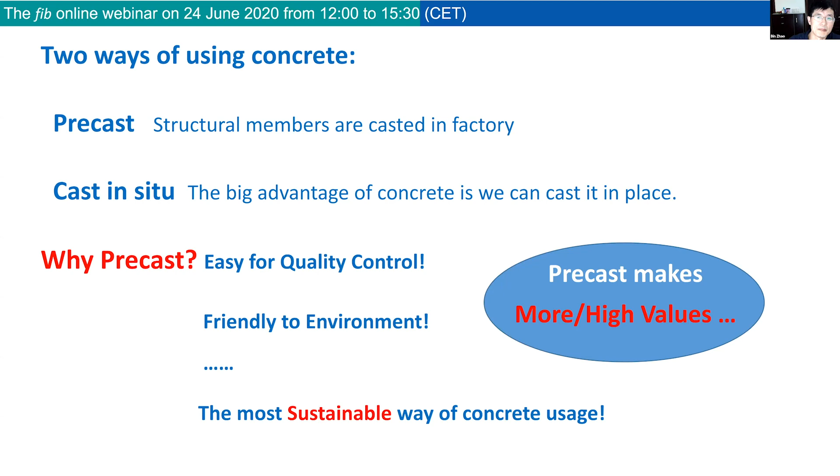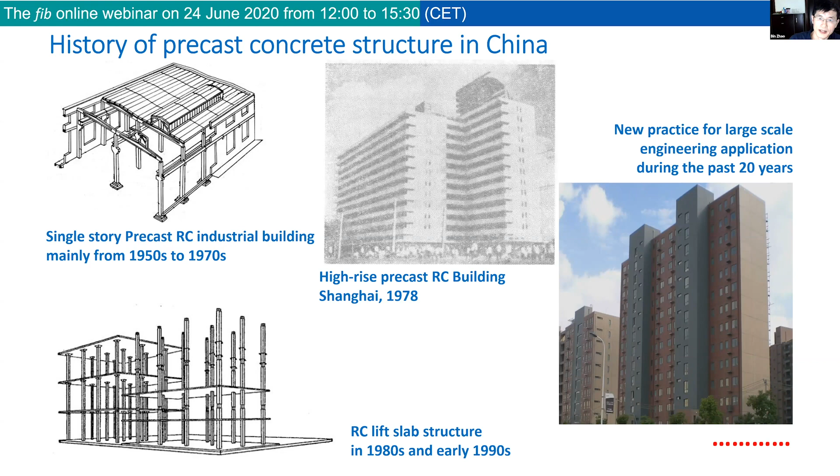The picture here shows the history of the precast concrete structure in China, from the 1950s. Let's just skip this slide. In fact, for casting in situ, you can also use some precast members, for example, the widely used hollow slab.

When we talk about precast structure, generally we mean full or part of the structure is made of precast members with wet joint or dry joint. So then the quality of in-place work and the seismic capacity become the key issues of the structure system.

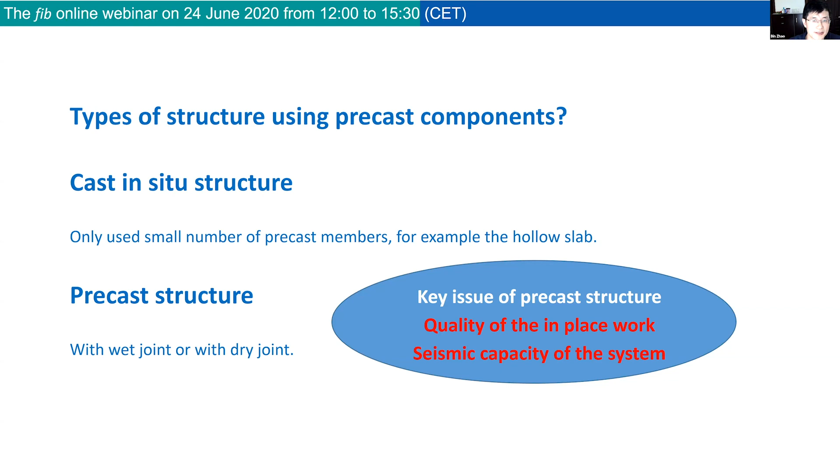So then comes our second question. Does precast make monolithic concrete structure? In this part, we will talk about if precast concrete structure with wet joint could have the same or similar seismic capacity, I mean, compared with the cast in situ structure.

So let's take this concrete frame as an example. We choose the joint as the test model, as you can see. Totally, we have 4 models here. All of them are full scale. For the first one, it's cast in situ with beam, column, sub-assemblies. We call it sub-assemblies.

The second one is precast concrete beam-column sub-assemblies, but for the joint part, the wet joint, we use normal concrete. Then we have another 2 specimens. We call it precast concrete beam-column sub-assembly with wet joint using fiber reinforced concrete. So we can just keep going.

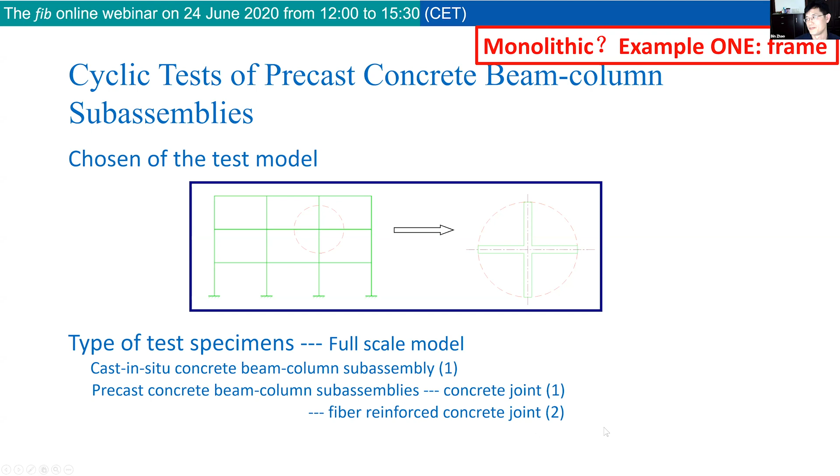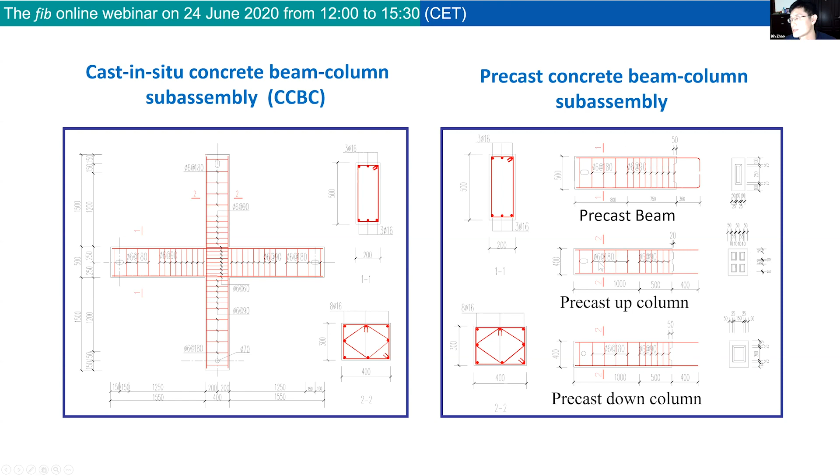Here you can see the details for this specimen, the cast in situ one, all the detail is shown here. Here you can also see the precast members. For the precast specimen, you also need the joint part. For the joint part, I have all the details for the shear reinforcement of the joint. So for the first one, cast in situ, the distance between the stirrups for the joint is 60 millimeter.

With stirrup ratio 0.83. For the second one, the wet joint used normal concrete, so we follow the same distance like the cast in situ one, the same ratio of the shear bars. For the third and the fourth specimen, we use the fiber reinforced concrete. We increase the distance of the stirrup from 60 to 120 and 180. So the ratio of the steel bar decreased.

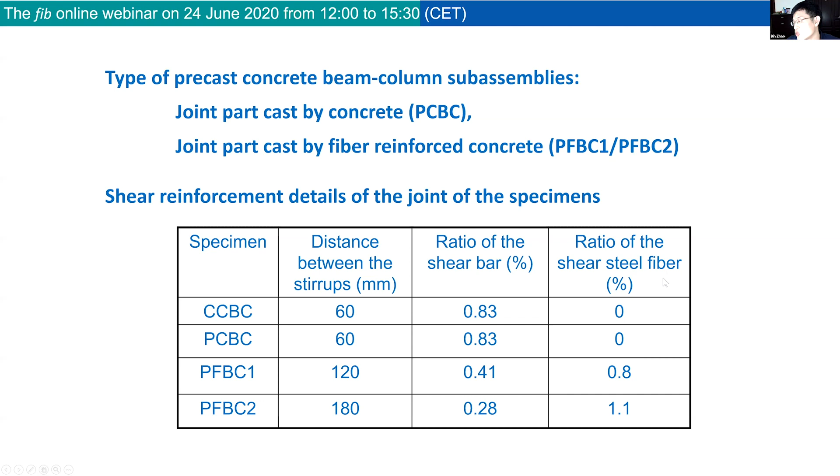But for concrete, we use the fiber reinforced concrete with 0.8 and 1.1 ratios for the steel fiber. So the pictures show you the cast in situ specimen and the precast one. So we can keep going.

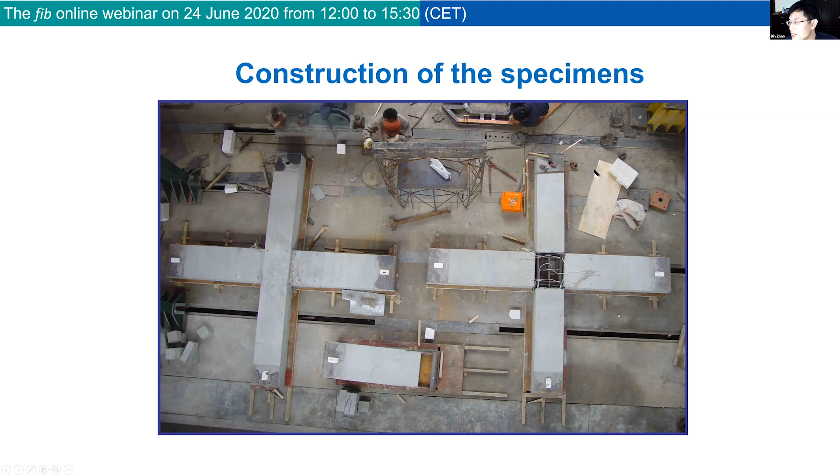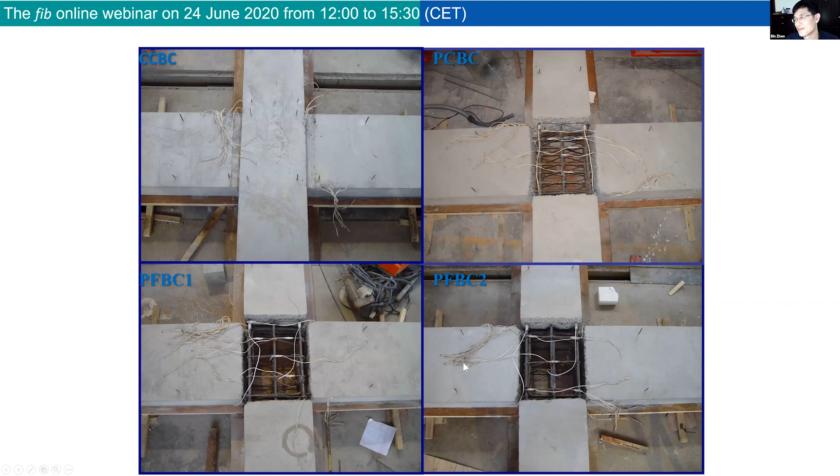So here you can have a close look at the joint. This one with more stirrups uses the normal concrete. This one with bigger distance, we use fiber reinforced concrete. This one we use more steel fiber. So that's the philosophy of the specimens.

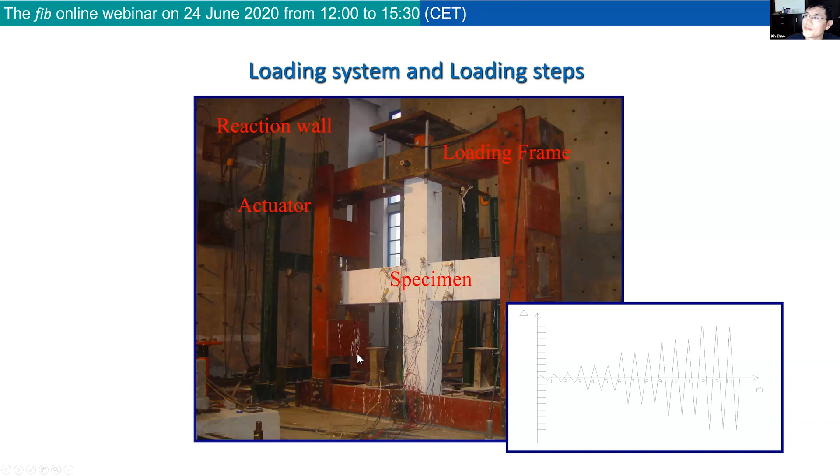So for loading, we use the loading frame. Here you can see the specimen, then you can see the actuator, the reaction wall. We follow cyclic loading to see the seismic behavior of the specimen. So after the test, you can see the pictures. The first photo shows you the cast in situ specimen, the front side and the back side. So you can see the hinge really occurs at the beam end.

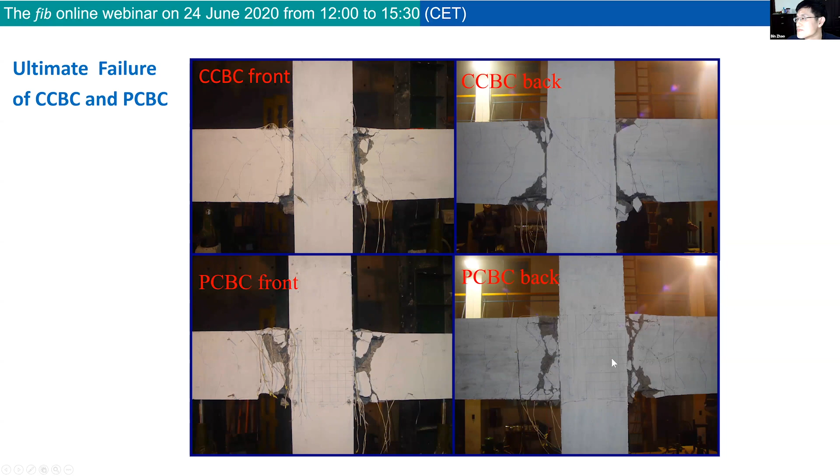For the wet joints using normal concrete, we got almost the same damage mode, the front and the back side. For the specimens with joints using fiber reinforced concrete, we got almost the same, even better result for the joint part because we use the steel fiber.

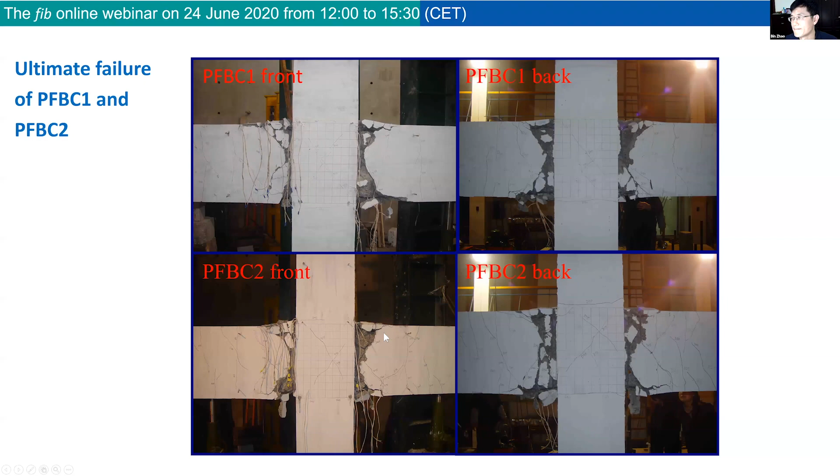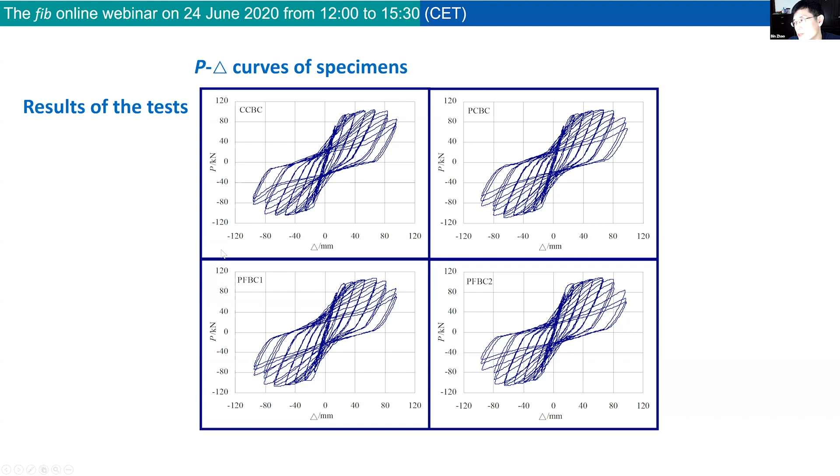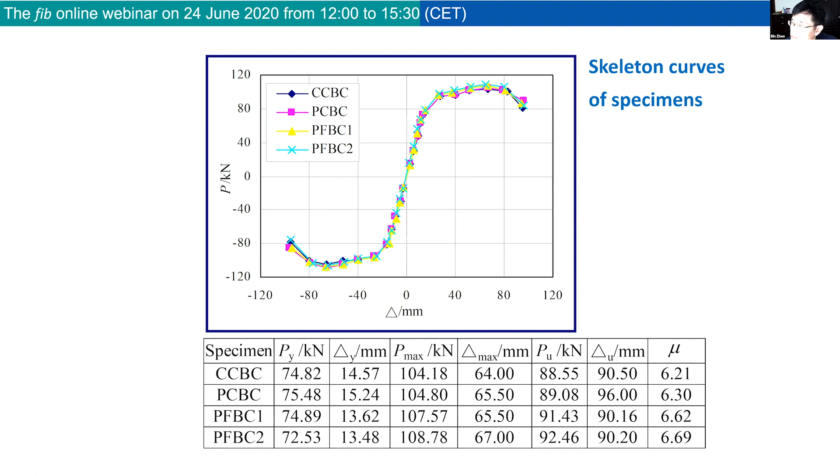So if you go to the curves, the load-displacement curves, you can see the curves for the specimens are very, very close. Here you can see the skeleton curves for all four specimens. It's very well matched. I think we can say the specimens really have the same seismic capacity.

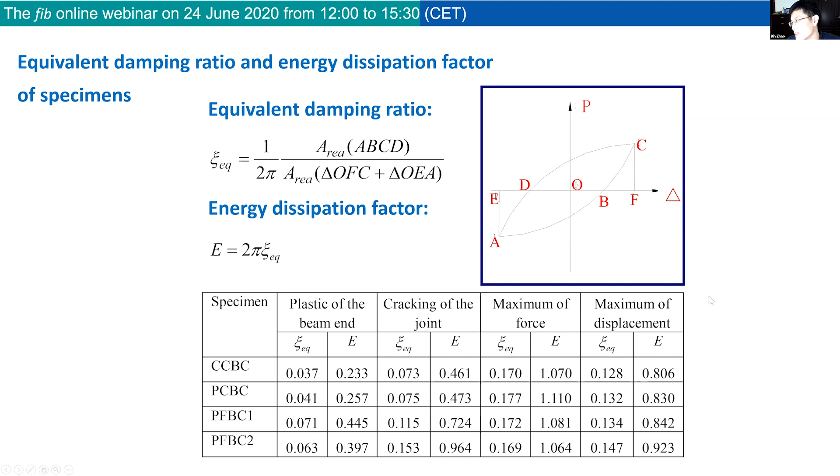From the test data you can also calculate the damping ratio to show the energy dissipation factors, but I'll just skip that. For a short conclusion, I'd like to say the precast concrete beam-column joint has the same seismic behavior as the cast in situ joint. Another conclusion is the shear stirrups can be decreased if the joint part is cast with fiber reinforced concrete.

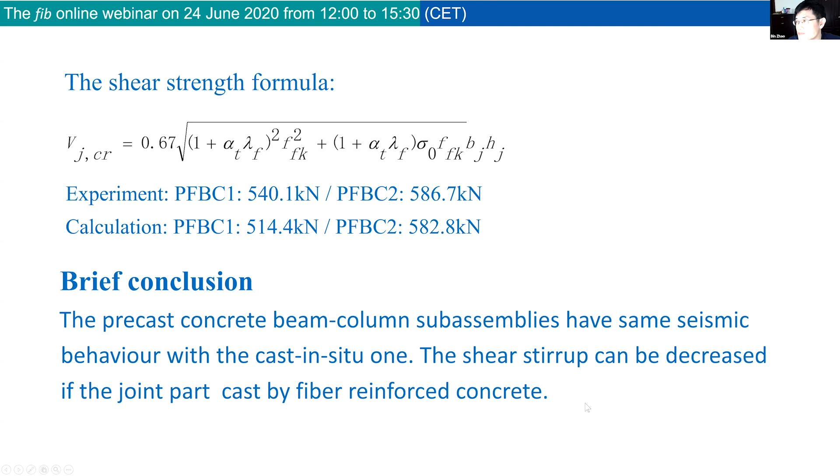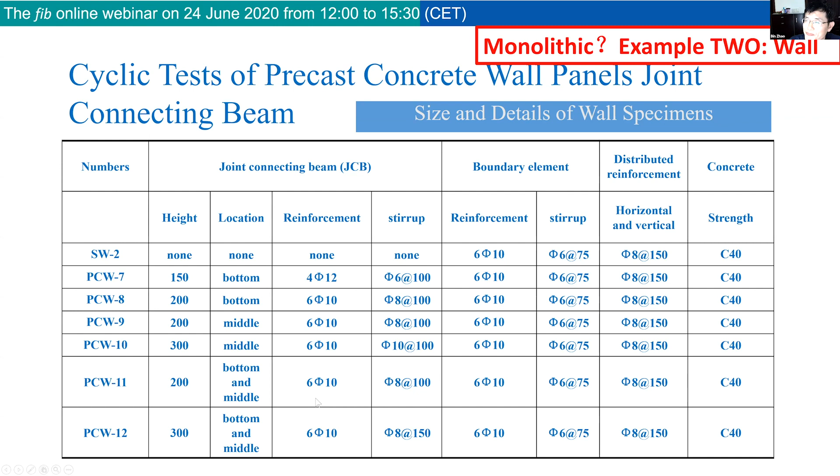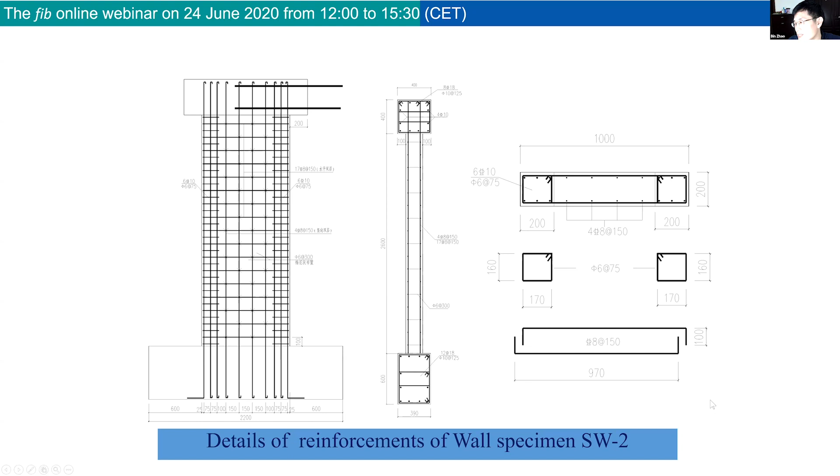For more details on the cast in situ one, you can see all the bars and the sizes. The wall panels have the same size. The difference for the precast wall panels is the joint, the joint beam, we call it a joint beam here. For PCW7 and PCW8, we have 2 specimens with joints at the same place. The difference for 7 and 8 is the height of the joint is different.

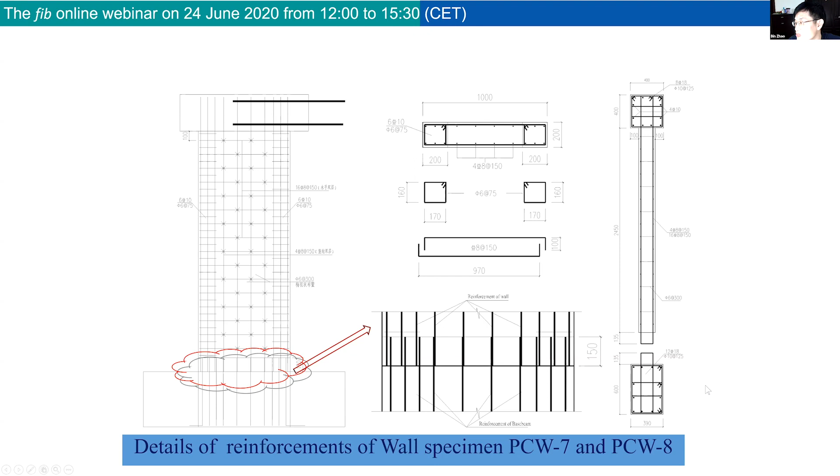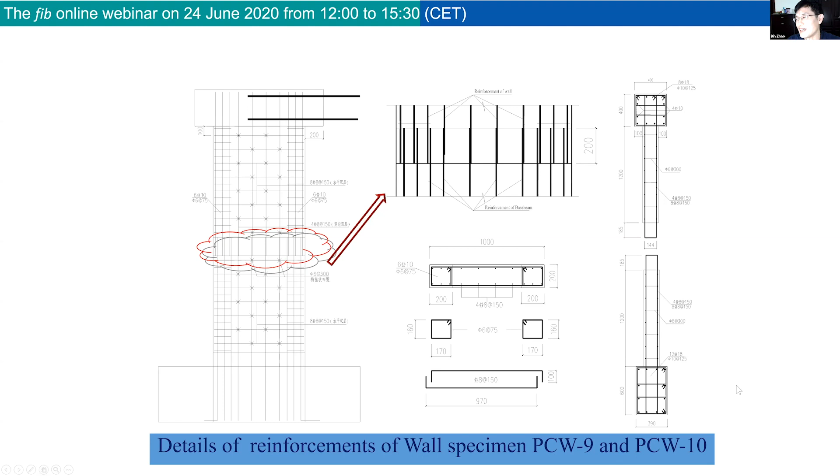Then we have specimen number 9 and number 10. For number 9 and number 10, we put the joint part in almost the middle of the wall panel. We just try to test the influence of the joint on the seismic behavior of the wall panel. For specimen number 11 and number 12, we have 2 connections, one in the middle, one at the bottom of the wall.

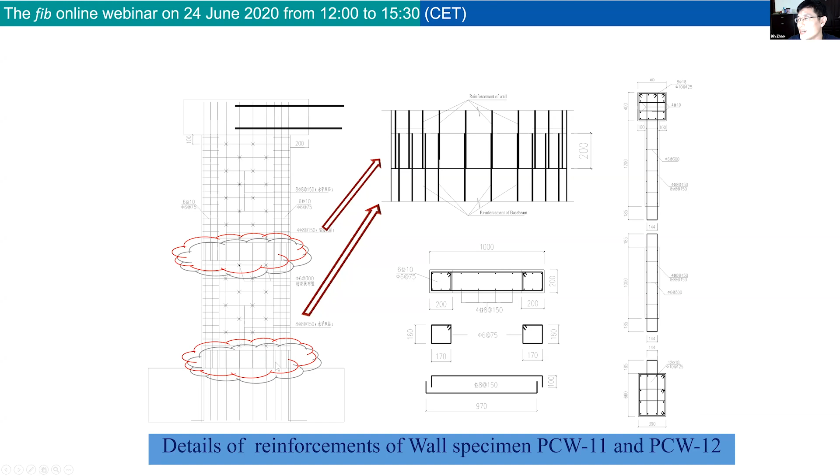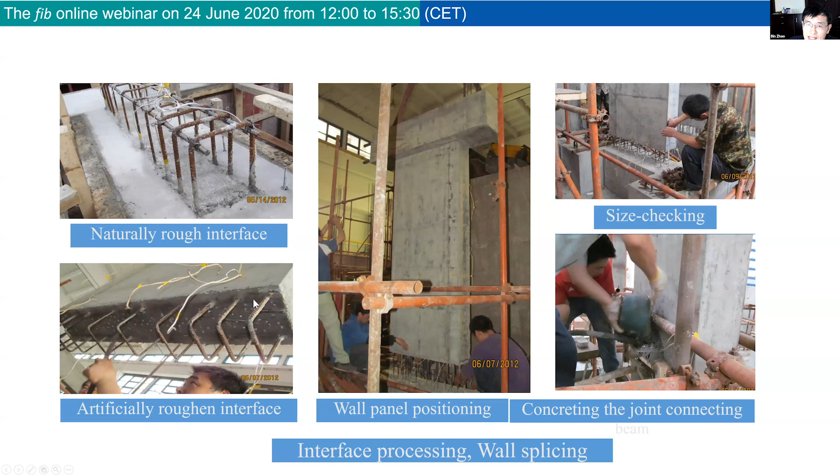So as you can see, yes, they tried to do a good job. But as you can see in the picture here, the quality of the wet joints didn't look good.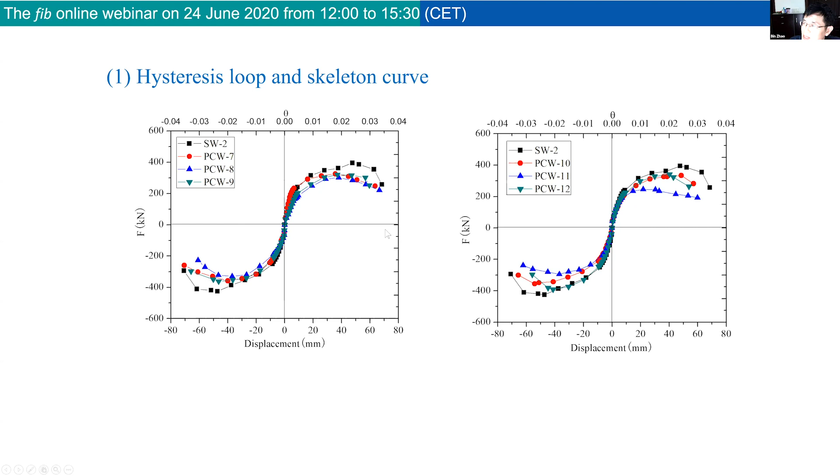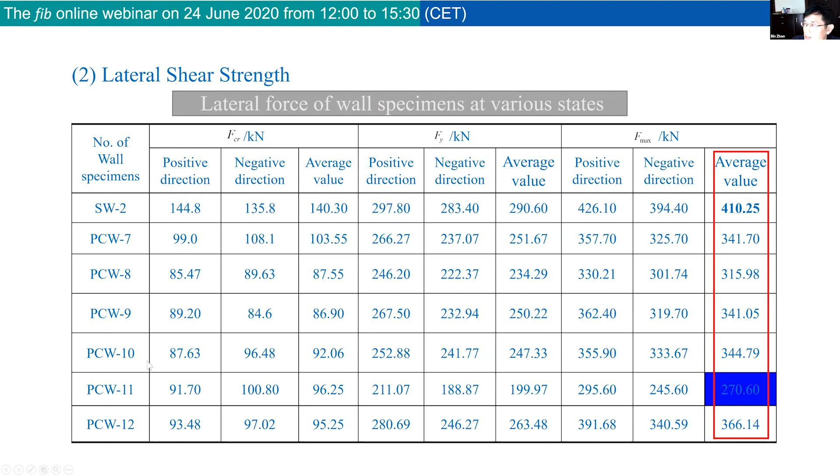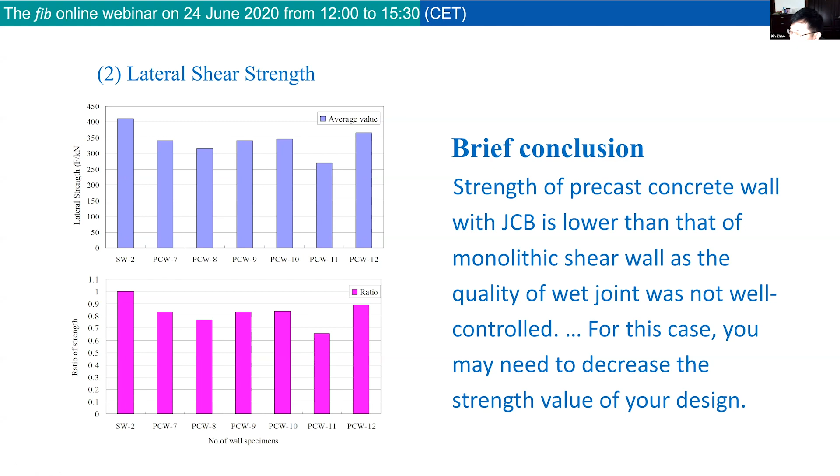We don't want to go very detailed on the test, so I just like to present you a general result. For this part, I'd like to say the strength of the precast concrete wall with the joint connecting beam is lower than that of the cast in situ wall panel, because the quality of the wet joint was not well controlled. So for this case, you may need to decrease the strength value in your design.

Then let's have a brief look at the behavior of bolt-connected precast concrete structure. We developed a modular precast structure system, as shown in the picture here. We set this room as a precast modular unit, just like a small room from a flat or even from a hotel. So we call it a precast unit.

For precast, we need to put all the units together. First, let's say the horizontal connection. For the unit here, they have one wall, but we divided the one wall into two parts. One half wall is attached to this unit, the other part to the nearby unit. So we put them together using bolt connectors. It's a real bolt; I can show more detail later.

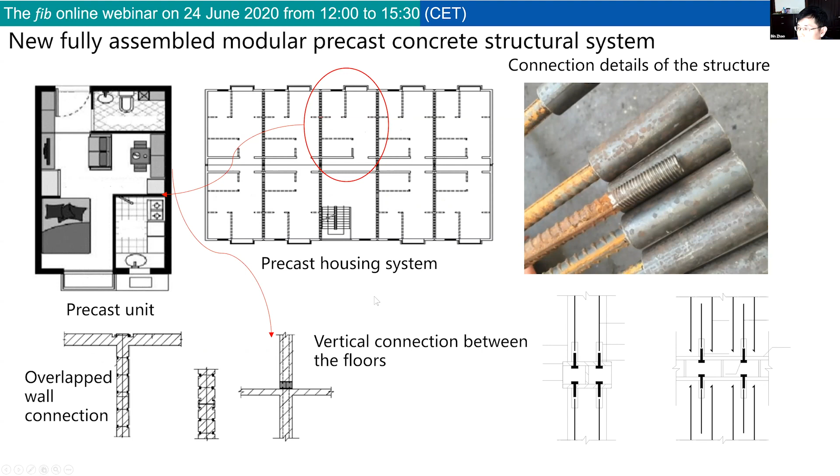Then for the vertical connection between the floors, we use the bolt system. Here you can see the bar, the connector, and the bolt. So we try to use this technology to have a new modular precast structure system. In total we tested 3 models. They are 5-story models, so we call them M5-O, M5 P1, M5 P2.

The first one is ordinary. Ordinary here means cast in situ, so it's a normal shear wall structure model. P1 is the modular structure system, but it fully followed the cast in situ procedure. Why do we have this model? We just like to check how the system works.

Another model we call P2. It's a real modular structure system: precast, fully assembled with dry joints. P1 also has the dry joint, but for P2 it's a real dry joint; we put everything together the precast way. For P1, we just have the idea, but we cast the model. We use the connector and the bolt, but we cast it in one time. But the joint is still there.

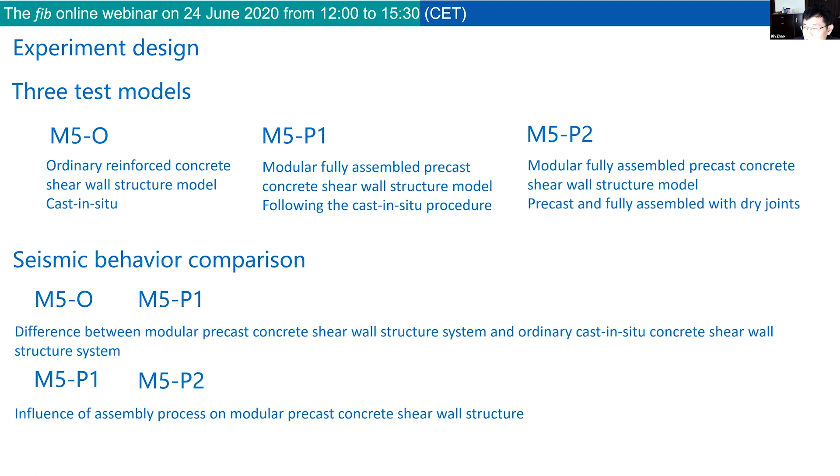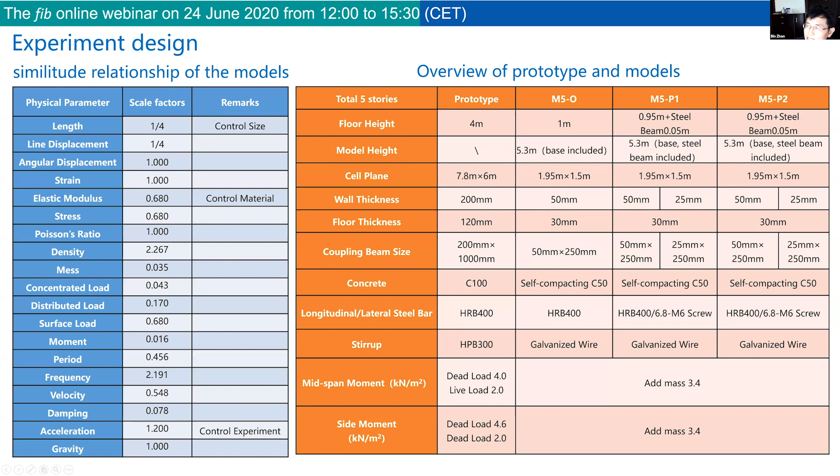For the model design, we chose the scale 1 to 4, that's 0.25 scale. I think we can go a little bit fast. Here you can see the size of the models. The size is the same for all models, and this one shows the precast model like this.

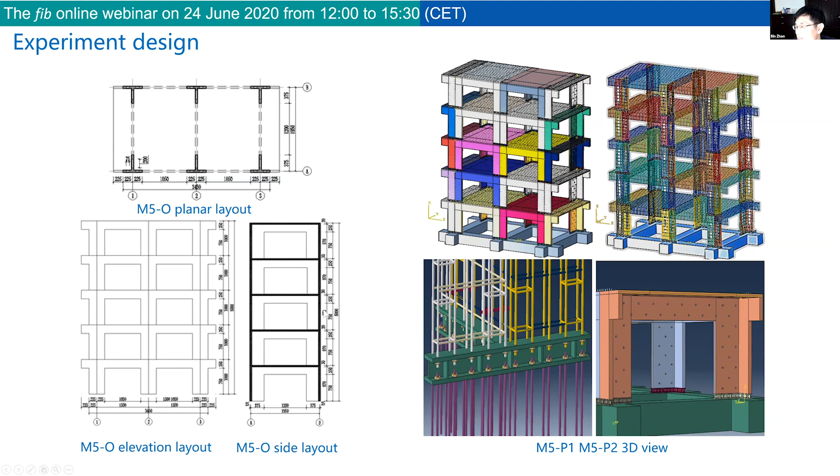I don't have enough time now, so I need to go fast. Here you can see the general size and the reinforcement.

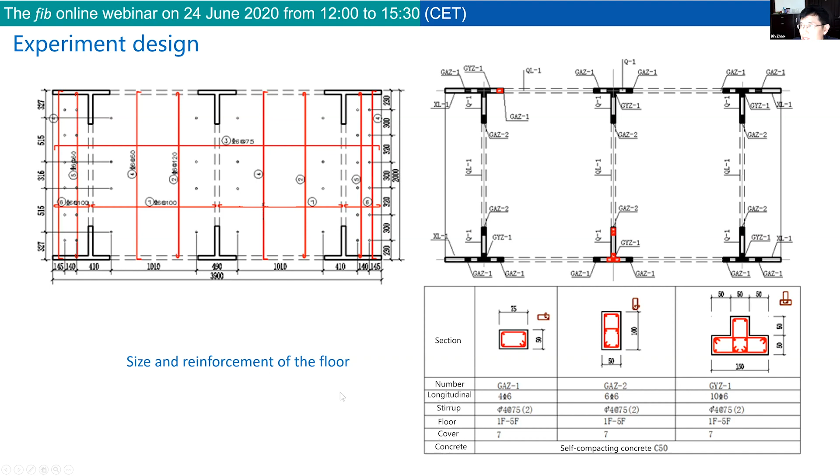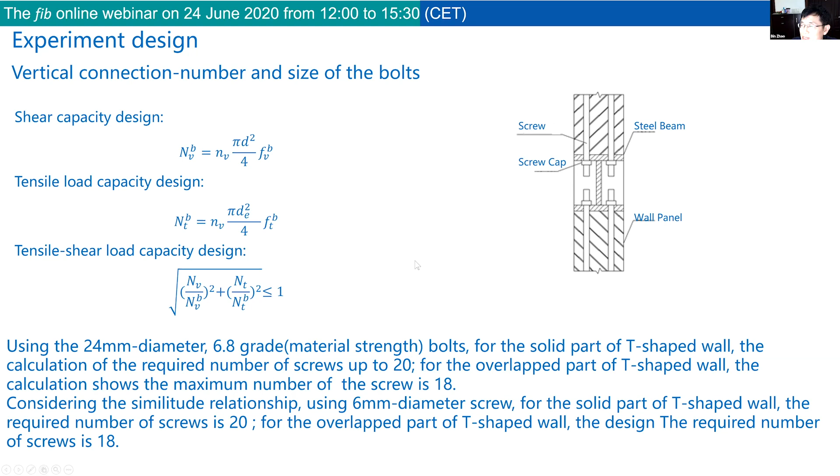For the connection, we need to design the bolt. We follow the expressions here to have a safe connection. This picture shows how we choose the vertical connection bars, meaning how many bolts we need for the wall panel.

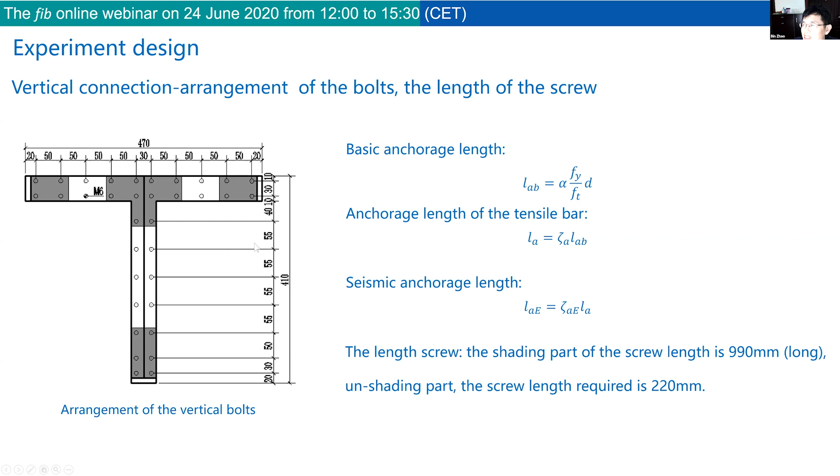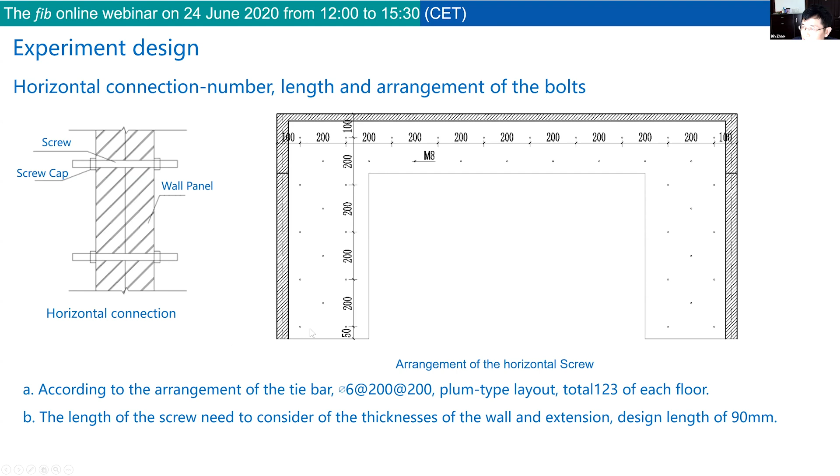For the horizontal connection, it's really a big number of bolts, because we like to use the bolt to represent the tie bars. For shear wall, there are no tie bars yet. So it's very boring for the design detail.

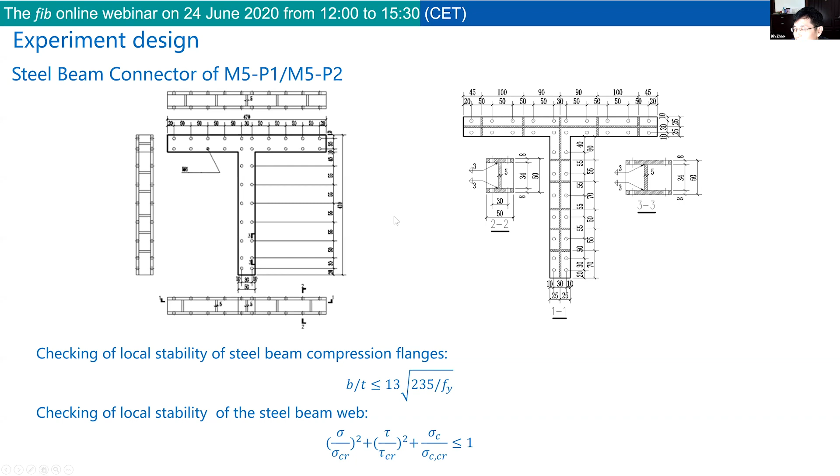So we can go see the pictures, that's how we made the specimen. First, for the cast in situ, we just go the normal way, then we got the model like this.

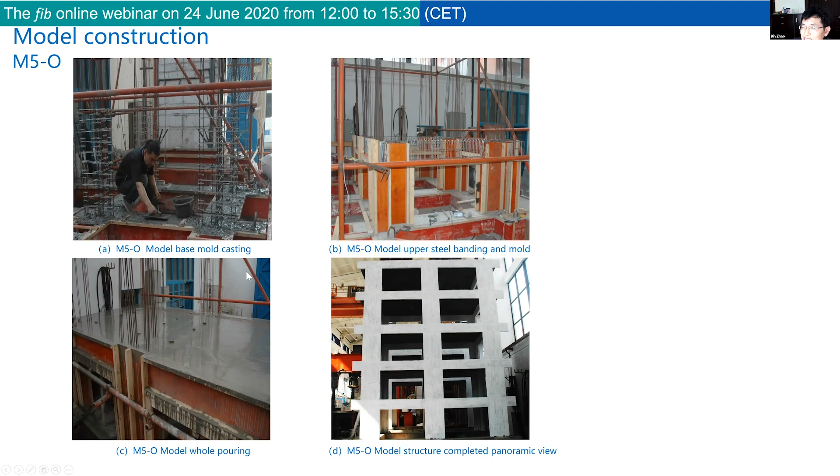For P1, we put the connection before casting, but for the joint, it's still there. Even for the horizontal connection, the walls are separated.

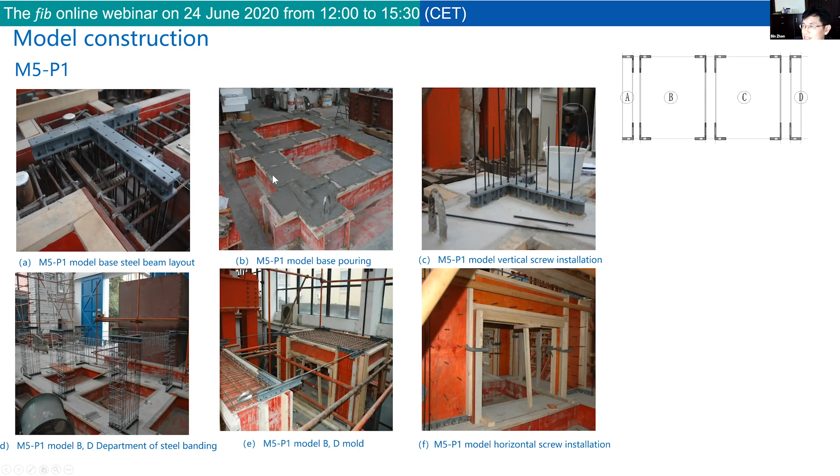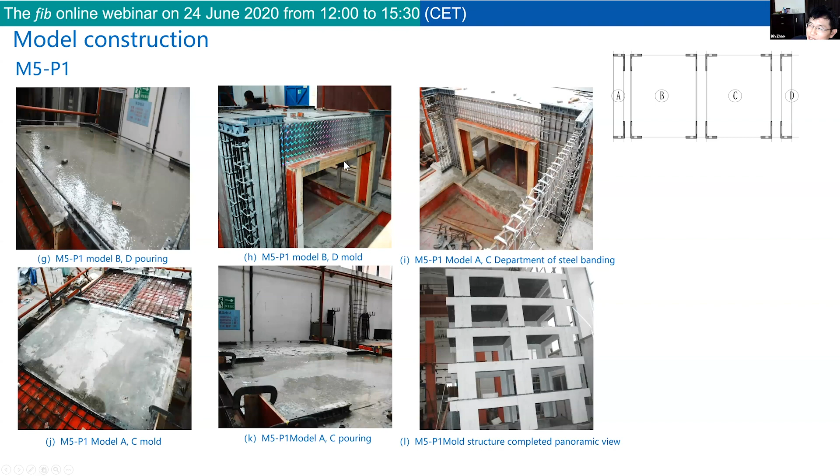For the real precast one, you can see the unit. We put all the units together, using bolts to connect the two walls.

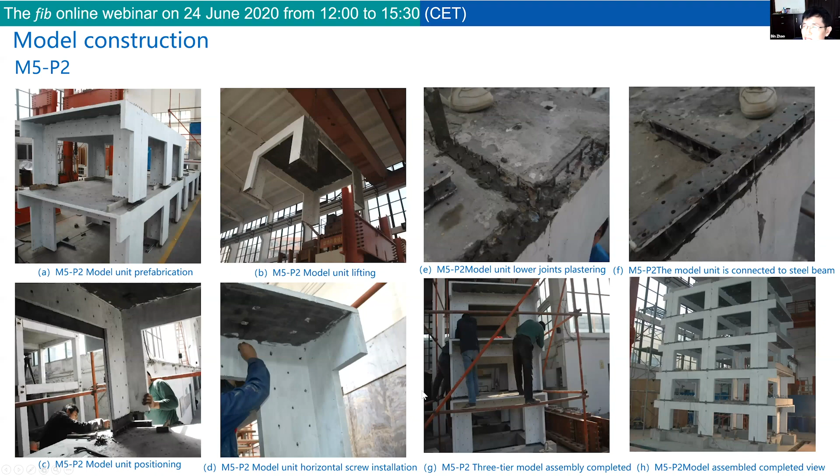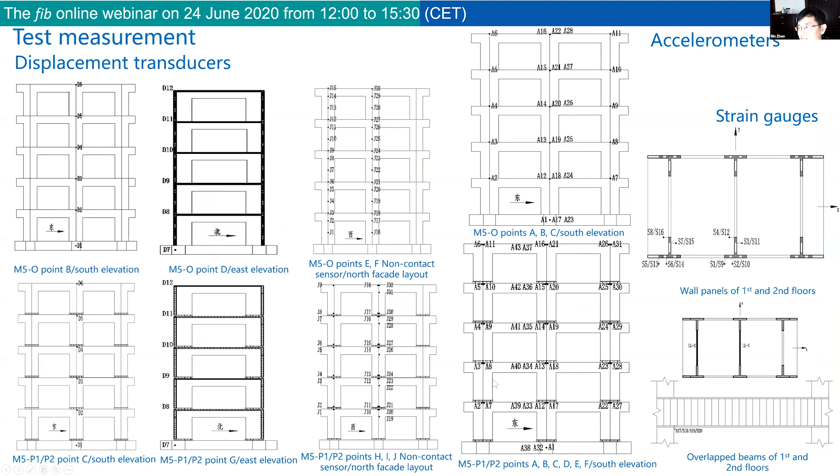The measurement, I suggest we skip it. We select some input waves, the earthquake waves, and check the spectrum of the waves. Then we can perform the test.

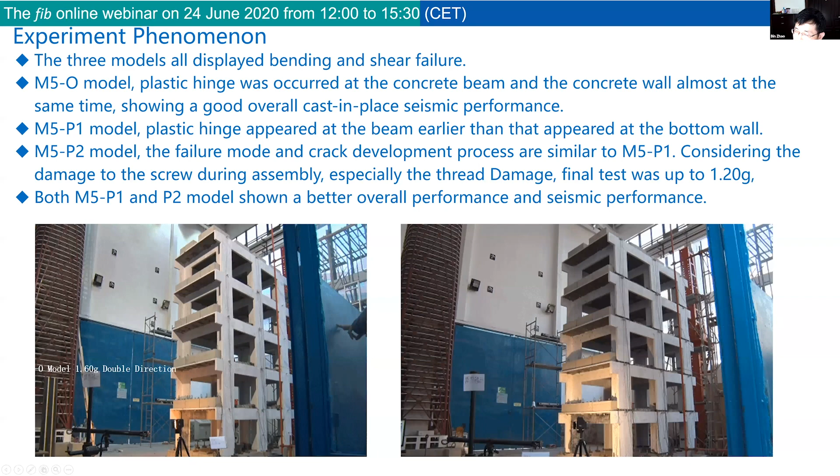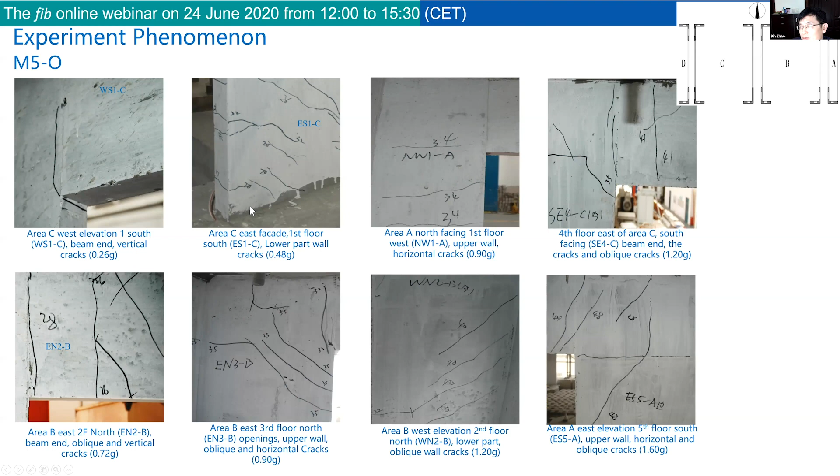In the cast in situ way, you can see there are also some cracks, quite similar, I'd like to say.

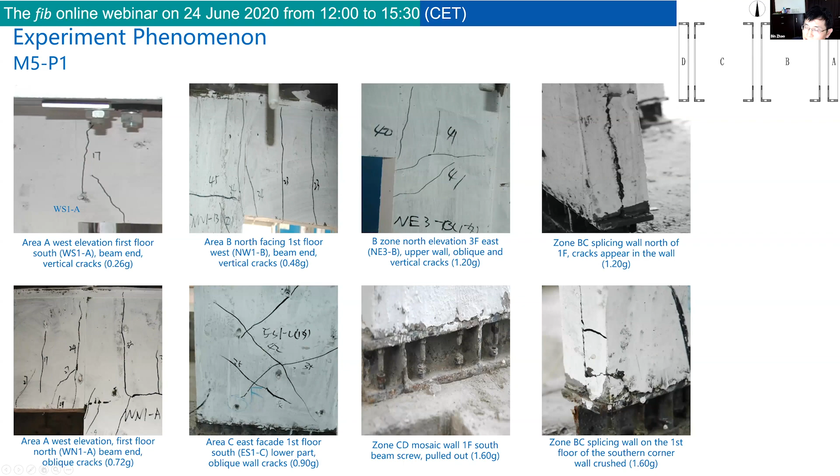If you check the cracks, I think you get similar results. You can see the similar crack pattern.

For the damage, we had damage in our precast structure. You can see it's the damage that comes from the bolt. I think a big number of bolts, the screw snapped. The damage is caused by this snapping.

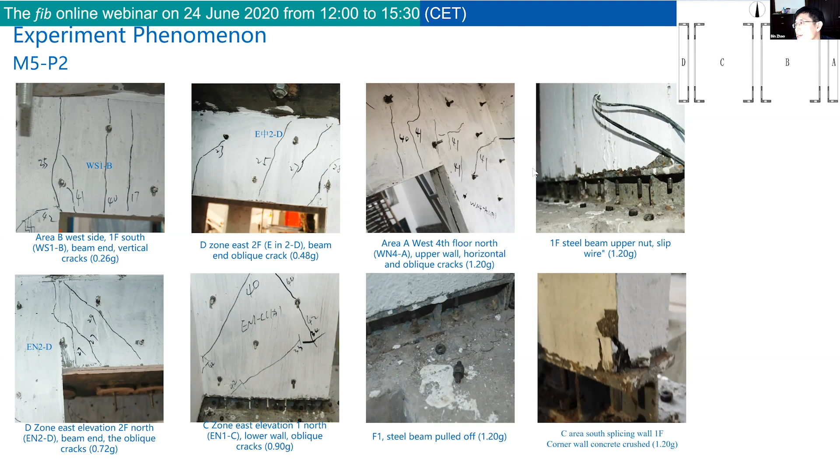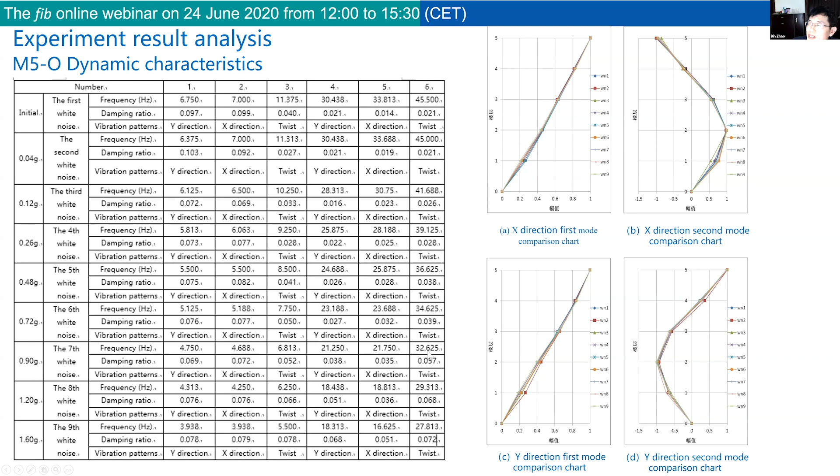We got it from the test result. For P1, the specimen, we got a similar model here. Then for P2, the real precast model, we also got a similar model shape.

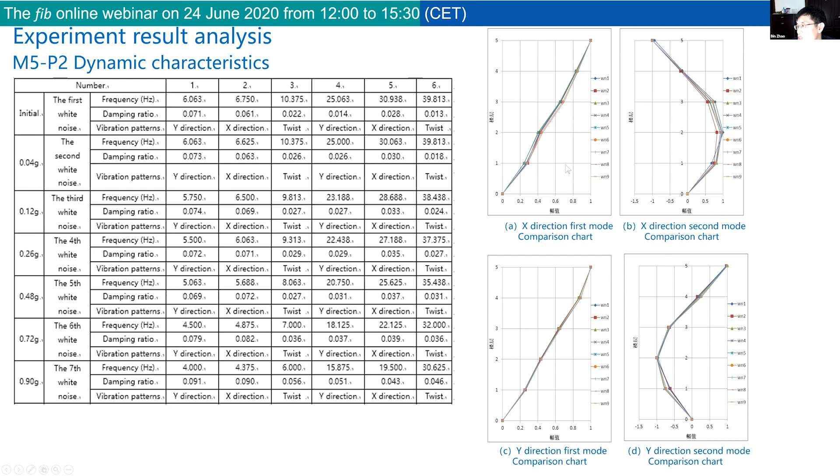I think it's important to have a close look at the change of frequency. For the cast in situ, before the test, we got frequency at 6.75 Hertz. But for the model system, we got a little bit lower frequency. If we follow the real precast way, we got even lower frequency.

So the difference is minus 3.7% and minus 6.7 percent.

If you keep increasing the input of the earthquake waves, we can see the change of the structure's stiffness, because its stiffness degrades. So here, after 0.04 G, we got the decrease, the percent of decrease of stiffness.

From these numbers, you can see for the cast in situ model, we got a bigger decrease, minus 5.6%. For P1, we got only minus 1%. But for the full precast model, there's no decrease.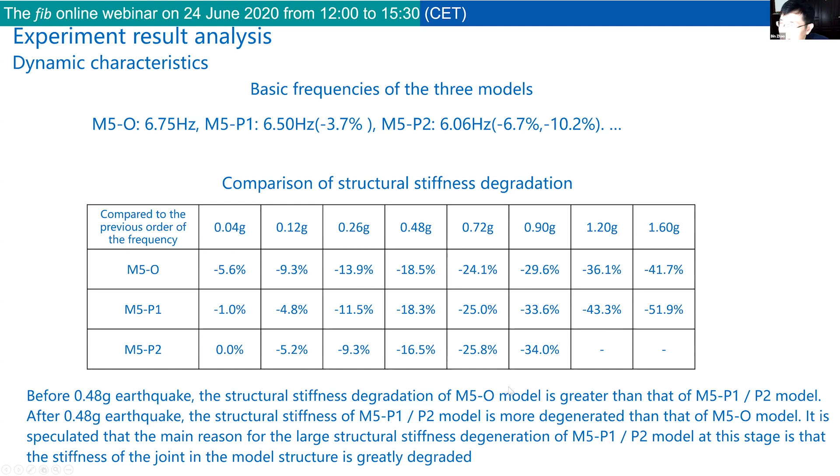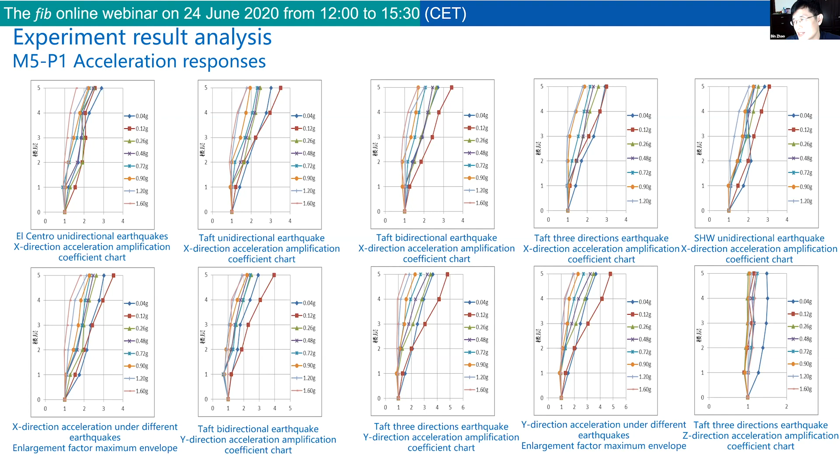From the test, we can get acceleration responses for this cast in situ specimen, also for precast 1 and precast 2. I don't go very detailed for the comparison, so I'll just show you the pictures here.

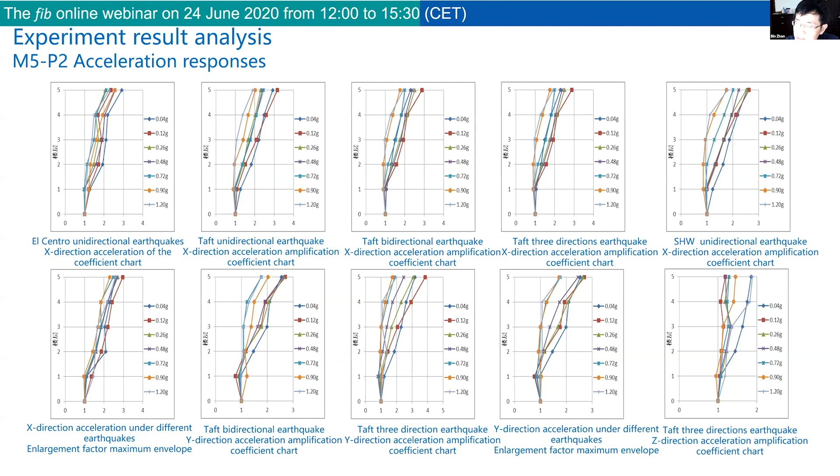For general conclusion, I think for precast structure with wet joints, it's possible to make the structure have the same seismic behavior as the cast in situ structure, only if the quality of the wet joints is well controlled. Generally, we suggest you use higher strength material, and keep a close check on the in-place work.